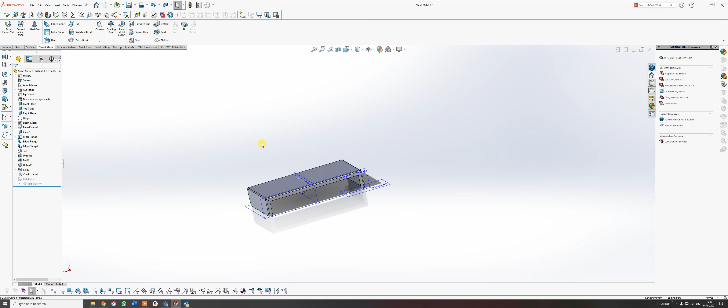Okay, I want to talk in this exercise about corner trim settings. It's very simple. This is as far as you probably have got from the previous exercise.

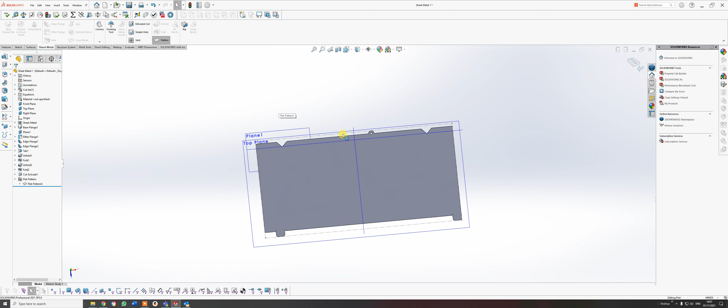If you actually flatten that pattern out, I've done it previously so I'm just going to unsuppress it, and it comes out there. I then rotate this round, and what I'm trying to do is, if you look at the flat pattern here, I've got that sort of corner. When you actually fold metal up, it can cause cracking. I call it a stress raiser.

To actually give that relief, you can trim those corners. So you can either go through here to corner trim, or go to insert, sheet metal, and pick it up in there. It doesn't matter which way, it's the same thing.

Now the settings I've got there you can keep, so it's 5mm and then 0.8 millimeter, which I haven't got. Well, if I go to ratio thickness... no, there should be 0.8.

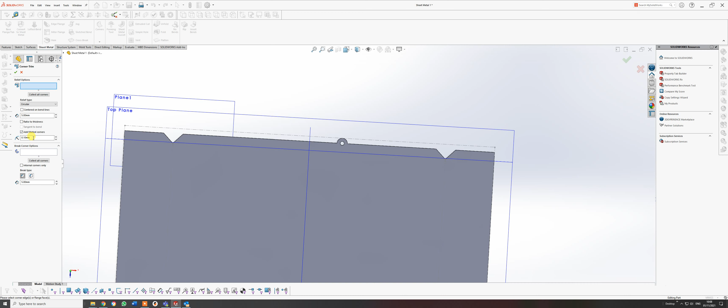Okay, so it's just a matter of where the blue highlight is going in and picking the places that you actually want to give a little bit of relief to, and then giving a green tick.

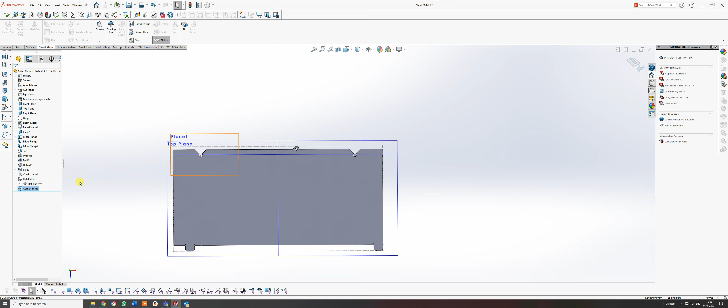Now if I go to unfold it, you won't notice any difference. It's just in the flat pattern marking, so when it's stamped out, those will actually be put in from that. That's all you really need to know at this point.

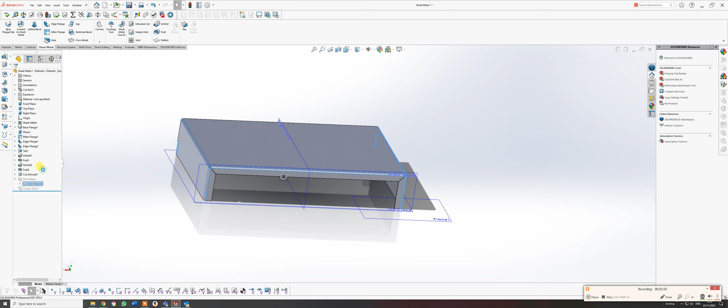There is a lot more you can look at because there are different types of relief. If I just go back to the flat pattern, and if I just go to edit feature on that one, you can see.

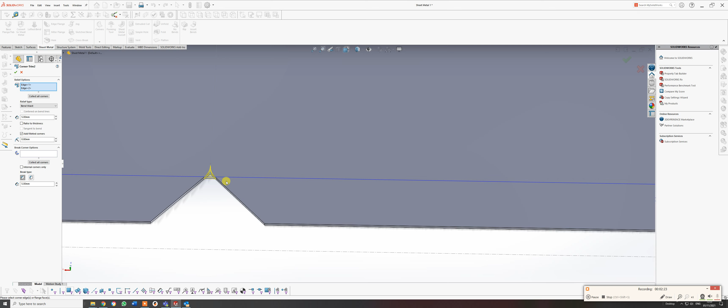We've got different options in terms of circular, square, and bend waist. So if I just do that once more, click on each individual one of those, you'll see the difference. So that's square and that's circular. For this particular exercise, circular is absolutely fine.

If you're doing it on areas like these, you can do it as what we call break corners, but for now this is probably as much as you need to do. You can go into it in your own time later on.

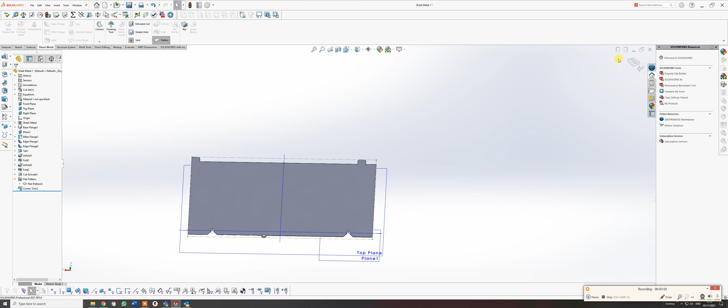What I'm going to do next, let me just give that a tick, so it should actually fold up again. No, it's not going to do it for me. Let's take that off. There we go.

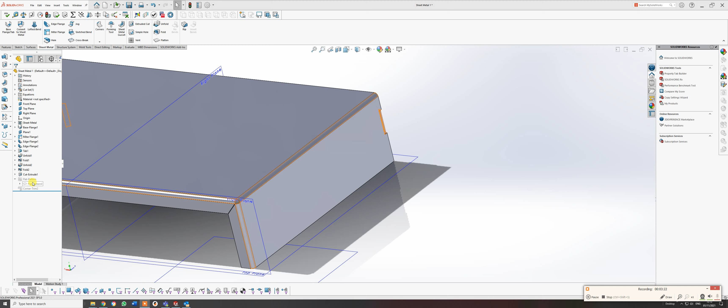I'm going to put those squares in that we talked about, so come back in one second. Okay, to put those squares in, we're going to use the unfold and fold commands, and you'll notice that those have actually been faded out because we're in a folded up method.

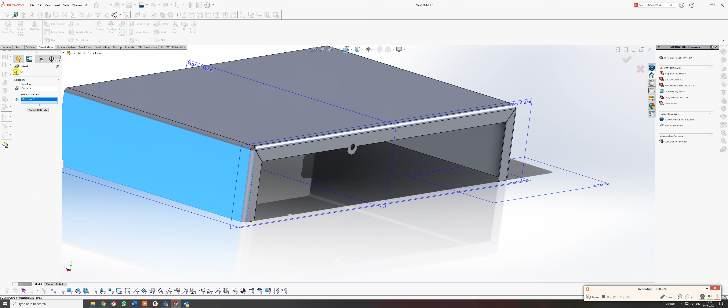I want to work on these corners individually, and that's where the unfold and fold come in very well. So all you need to do is click on unfold, and it says the fixed face. So this here is my fixed face, and then bend to unfold. Click on that one and give it a tick, and it should unfold. And there we go, nicely unfolded.

So I can now work on that surface. I need to put a sketch in. I'm just going to switch off my planes because I can get a little bit of better clarity. So I'm actually going to go to sketch.

I'm going to do it on that surface there. I'm going to use the rectangular tool because it's a rectangular cut that I want to do. Just roughly put that out there, and then go to my dimension tool, smart dimension, and if I do that one there at 30, not far off.

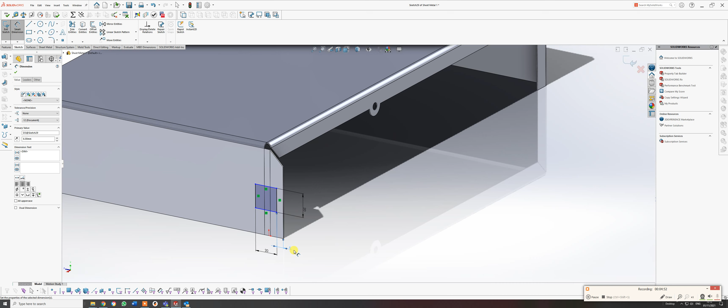Okay, and I do the side one at 20. Okay, and then I need that line there to the edge of that, there is 6mm. It's 6. Okay, and the distance from the base to that bottom line down there is 25mm. Let's put that out there.

And 25. Okay, I've fully defined the sketch that I want to cut through. Now I could go to features and extrude cut on that one, but I'm going to go to my sheet metal toolbox there and do the extrude cut because it will give me the option. Well, it should have given me the option to go up to thickness of metal, but don't worry.

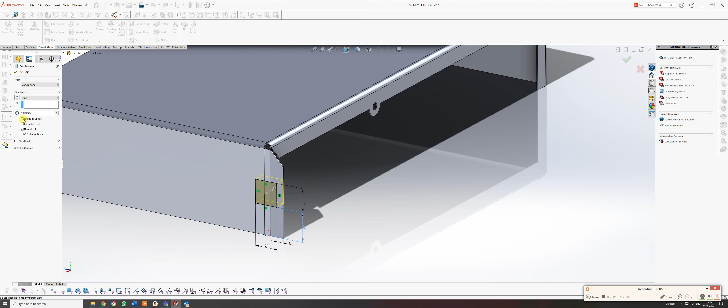Sorry, I've got it there. Link to thickness of metal on that one there, so it will just go through for that. That's the thing about SolidWorks; it's so vast and so many different things that you can forget what you're up to. So we've got that square in there now.

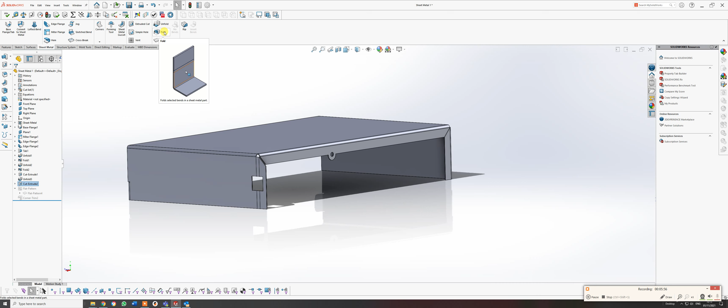Now, what I would normally do, if I just then fold that back up again, so just go to fold command.

It's already selected my fixed face, select the bend I want to fold, and then just right hand click, and you can see that's gone around quite nicely.

Now to get one exactly the same on the opposite side, I'll just show you this because it doesn't work as it would do in terms of your setup, so I keep switching this on and off.

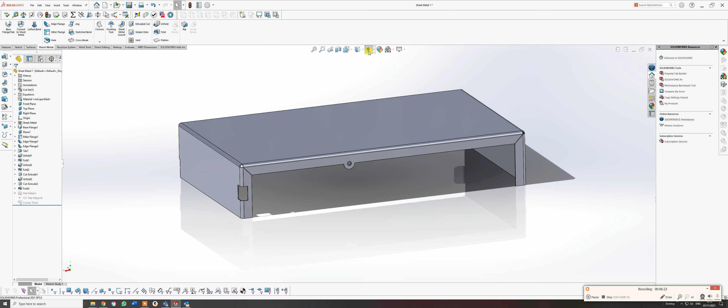Right, let's try again. If I put those back on, what you would normally think you could do is go to features and go to mirror and mirror face plane. If I pick that as that there, and if I go to bodies to mirror on this one here and go to my last extrude cut, it won't do it. It doesn't accept it. Even if I go to features to mirror, I don't think that will work.

Or has it? Let's have a look. No, it won't do it. So it's a failed process to look at it. So in sheet metal, if I just go up to there, it will.

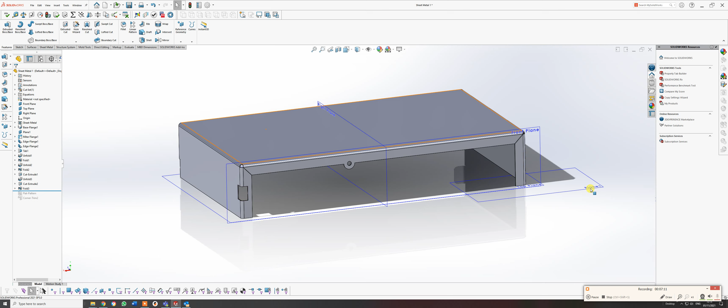I'll just delete that. You need to actually do it again. So let's do that very quickly for another exercise. So I want to unfold.

So back into my sheet metal, I want to go to unfold. So I want to keep that's my fixed face. That is my bend. And give it a tick out. And then go to sketch.

And I'll just do that roughly, doing that face there. Let's just do that. Okay, you can see how that can confuse things, so just switch them off that way.

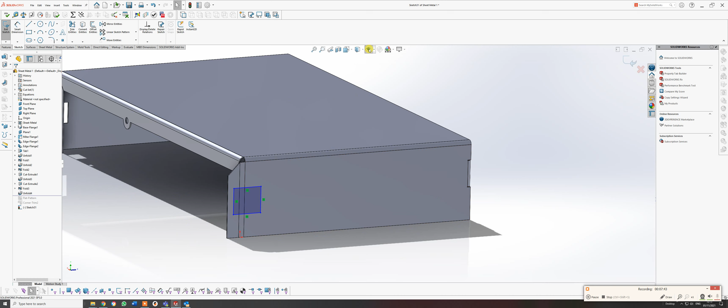And that smart dimension is at 20. Do that 20. Okay, is it going to change for me? Yes, 20 down there.

Okay, it's green tick, and we go from there to there. That's 6. Just get into sort of good practice that, just try and arrange it, because when you come to do your actual drawings, just try and arrange these in a place that actually makes kind of sense.

From there to there is 25. Okay, change and give that a good tick.

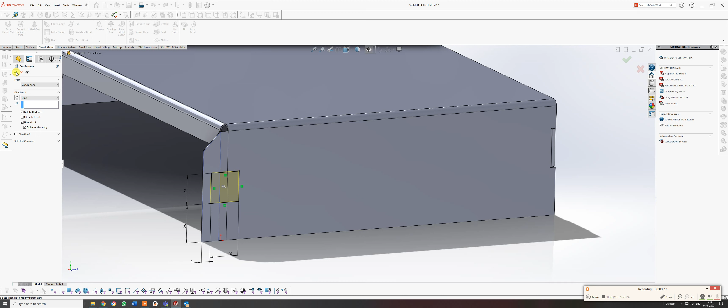And then go back to my sheet metal and go into extrude cut. Make sure link to thickness, which it is. Sometimes you need to joggle these about because my computer's 5+ years old, and I know a bad workman blames his tools, but sometimes processing speed does not always keep up with the program that you actually have.

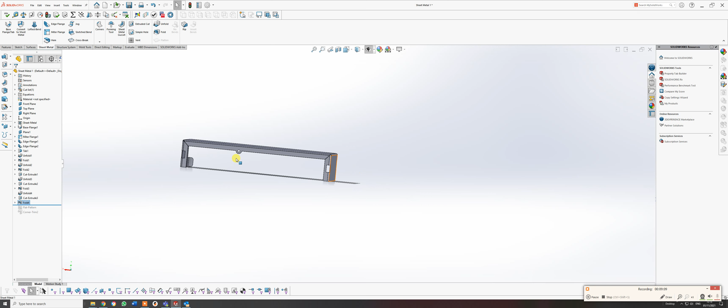I'm just right clicking there on my mouse. You see the icon. So there I have my 2 cuts into the box itself.

Now what you can do, I don't know if you realise this, if I was to create a drawing from this, let's just quickly do that. Let's say make drawing from part, and I'm sure you know all this.

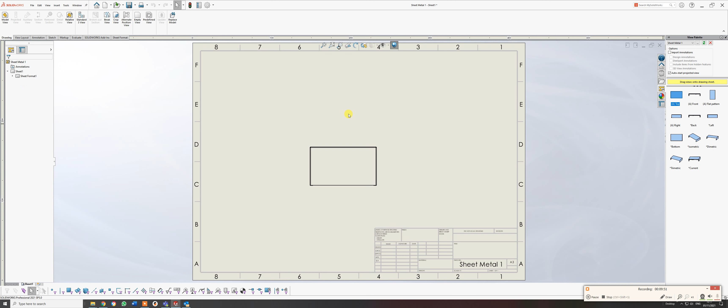Let's do A3. That's with my... is that my own? No, it's not my own. And if I want to bring in, let's just bring in that top view there. Let's do that one there, that one there.

If I were to go in and make a change, so that's my drawing there. If I control and tab, okay, it goes back into there.

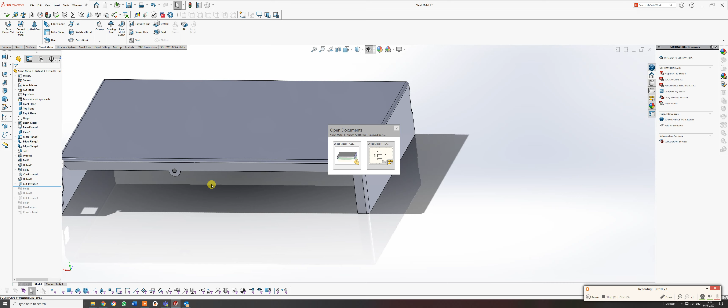And let's say I want to go back. Let me just take that one out. Let's just take it so it's folded back up again. Okay, and if I go control tab back to my drawing, okay, you can see it started to update the drawing.

So it has actually eliminated the tab that should be there. Let me just go for a regen. No, it hasn't come back in.

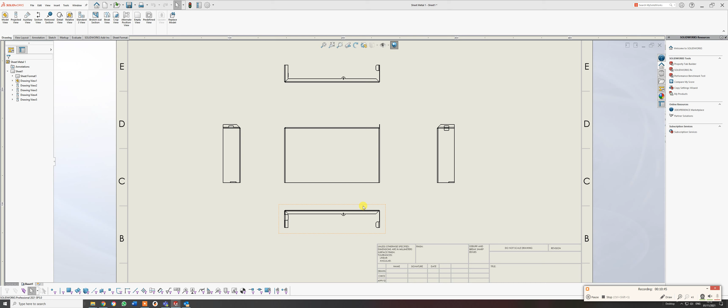If I just go back to my drawing, I say my drawing, my point there. If I just bring that to fold and unfold, and then come down to there, you'll see that this comes back in. So it kind of updates the drawing, and you can see we're back in there for now.

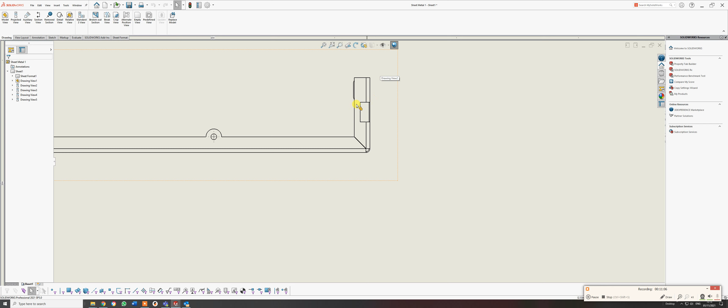I'd have to go back and delete that sketch from it. So you can actually, I mean, to save you time, if you're doing stuff in SolidWorks and to produce the drawings, that and that are actually linked together. So any changes you make will immediately be updated in that. So it would save you quite a considerable amount of time to actually keep the two going concurrently.

I'm going to delete this. I'm not going to save it.

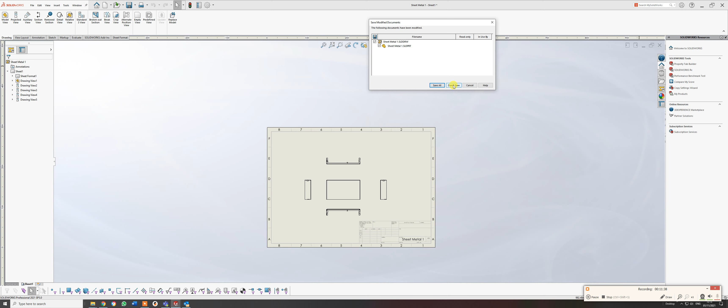Just don't save that. So we're back to this one here.

So what I'm next going to do is go on to the forming tools, but I'm desperate for a cup of tea, so I'm just going to go and grab one. See you in a minute.

Okay, I'm going to talk about the forming tools as we did in the session. Now, to actually find your forming tools, they are in the design library, and if you look, mine have gone away. Oh, here we go. I'm just going to go back to where I was to start with. If I just take that out, you'll see there, as default, you've got SolidWorks content, forming tools and toolbox.

The toolbox there is all screws, nuts and other bits and pieces that you can bring in and size, so you don't actually have to draw those. The forming tools, now this may or may not be in yours, and you need to actually add it in.

Now, to do that, if you go to your file directory, let's just see that one there. Okay, so onto your, in my case it's on my C drive. I don't know if you've put this onto a separate hard drive or whatever. You want to go down to program data, so double click on that, and then this is where it all goes wrong, down to SolidWorks. Now I'm on 2021. You're probably on the 2020. No, you are on 2021 there, but you can go back in time if you have other pieces.

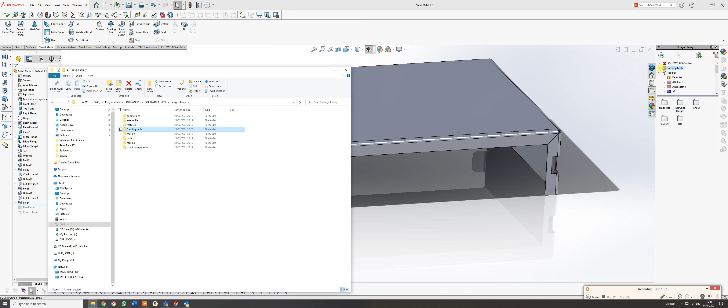So just to go back on that, so it's in my C drive. You're going to program data, SolidWorks, whatever version of SolidWorks you've got, and then you're looking for design library. You just then pick it up and drop it in, and that then gives you all the different tools that you require. So there I've got sort of different embosses, extruded flanges, lances, louvers, and different ribs, and we did sort of go over that a little bit in lesson before.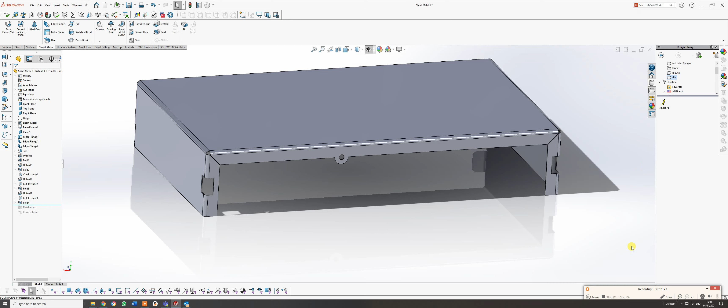Now these are all sort of default dimensions. So what I'm going to do for the first one is to put in an emboss. So we've got circular countersunk, countersink emboss.

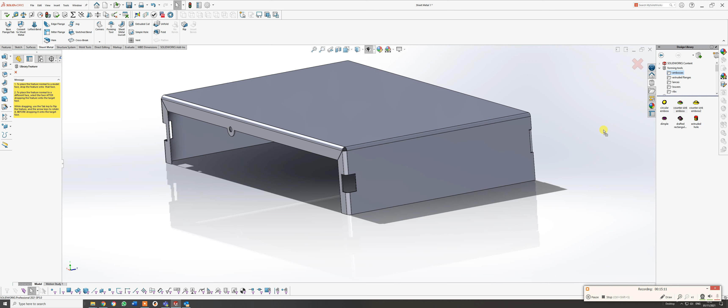There's two of those there, so I'm just going to look at doing a circular one. That one there, so the countersink or countersunk one. So I just literally pick it up, bring it across, and roughly find out where I want to put this. Now it's going to be around about the back here, and we can actually work out the dimensions in a bit for that.

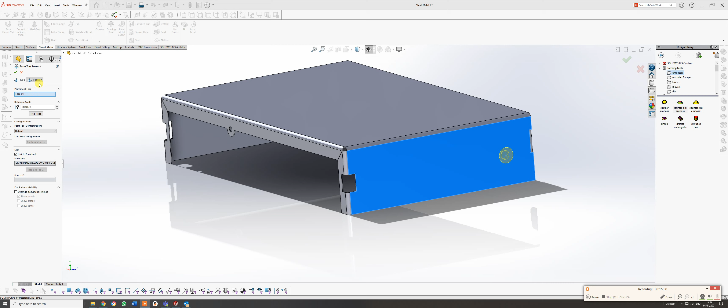And that then automatically brings up my form tool feature. So a bit like the hole wizard, I have got a position that I can actually place this. So to do that, I'm going to use the dimensions element to actually place where I want this.

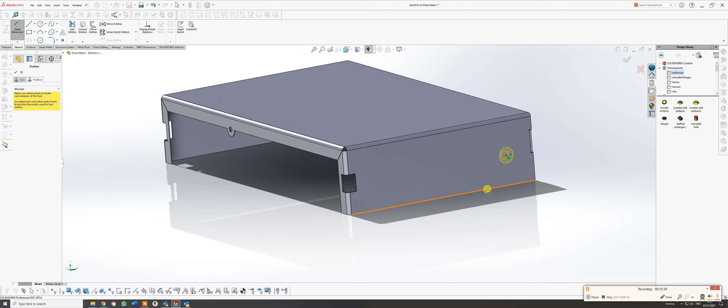Now, I beg your pardon, just one second. Okay, from that end point, or that line there, to that centre, I want that to be 45 millimeters. Okay, and then I want from that point there to the centre of that one there, I want that to be 30 millimeters.

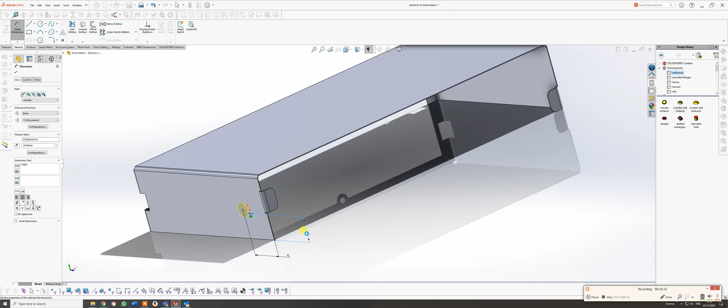Okay, so that's in position. Now it's already got the kind of primary values in there, so I can change particular aspects on it. Now there are configurations which I'll go into another time for that, because we can do configurations of parts as well.

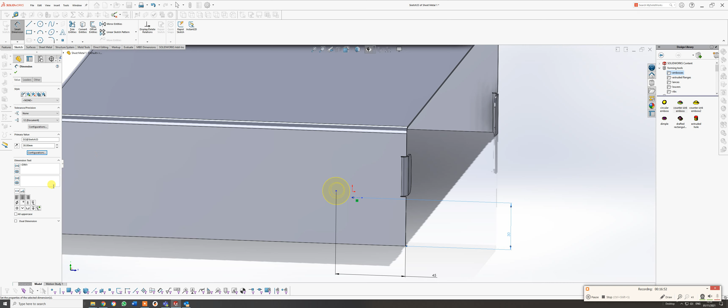Let me just bring that in. Okay, that's actually brought that centre into that centre there. Let's just give that a green tick and see where we are. If that's actually done it. It has done, but it's not in the right place.

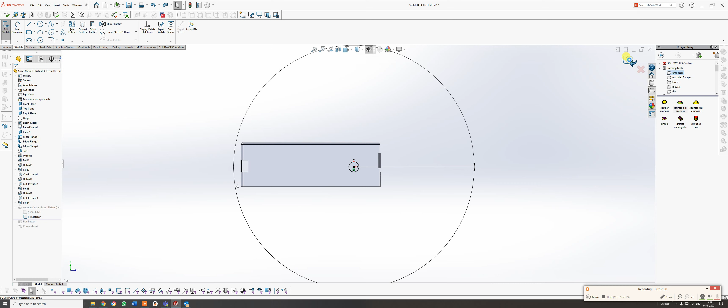So I've just gone through to look at edit sketch on those. Just let me come out of this if I can. Let's just see what it does. Okay, so it is actually in the right position. If I just go on to that, go to edit sketch, and you can see I'm 45 and 30 to the centre of where it is. But what was troubling me was that the UCS was slightly off, and I would have expected it to be in the centre of that.

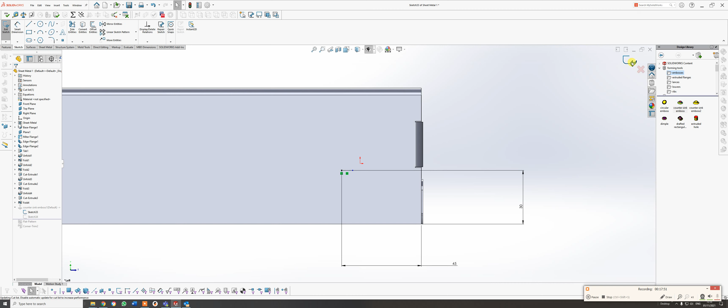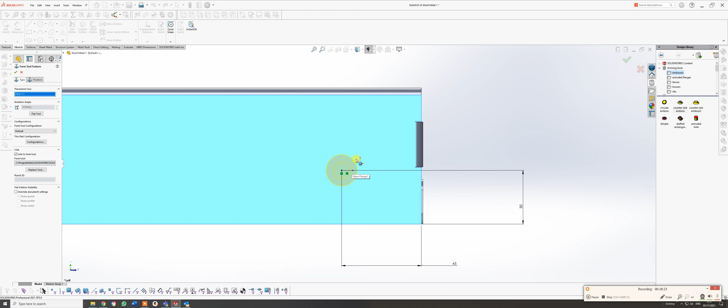Well, it's jumped to that one. If I go back onto here and go to edit feature, it doesn't give me a lot of options, only in terms of the actual position, so I can change the position by changing those elements. I've got the default one for the part configuration there, so I really need to go back in and look at the sketch.

If I show you this way, let's just see if we can do it this way. Edit sketch, let's just take that off there, and see what happens if I move that away. Okay, so I probably need to put some more dimensions in for this, and this may not be 100%.

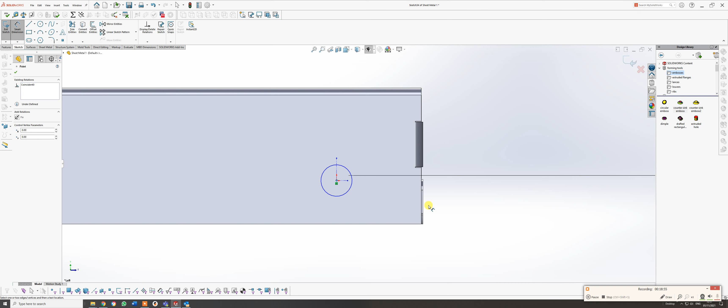I've also noticed something else is not, well, it's okay. So from there to there, actually it's to that face there. That should be 45. See if it's going to change it. It's done that, and then go from there to that point there, and that should be 30.

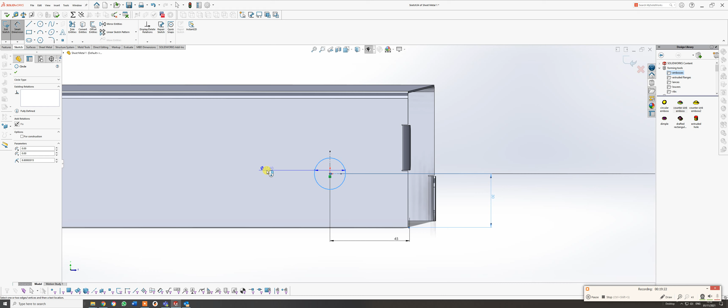Okay, what I wanted to do is actually try and change this, but this will give me a false element. Yes, so it then becomes over-defined because it's been predetermined on that one. Let me just give that a green tick. So you don't need to go back and do that, you can just drop those in there.

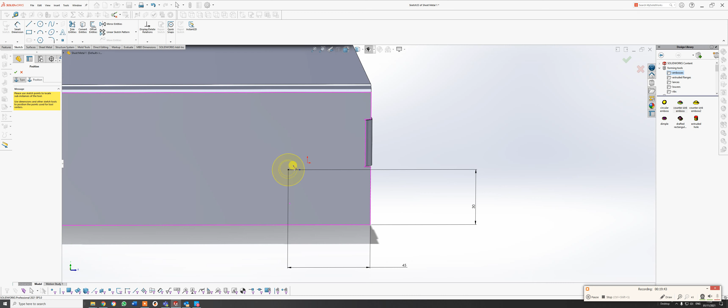Okay, because that's a default tool, I'm not going to change it. We can actually just put it in position so it's a standard size tool. You can actually create custom forms for it, and I won't show you that at the moment because it might confuse the issue a little bit more.

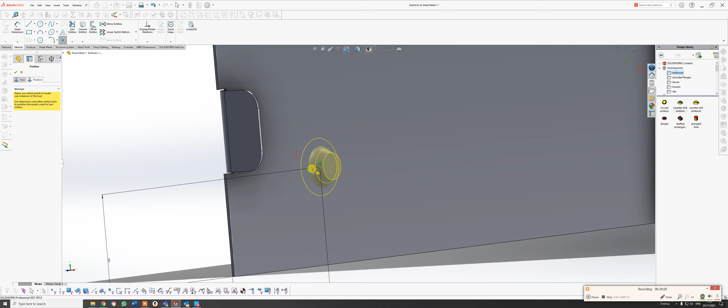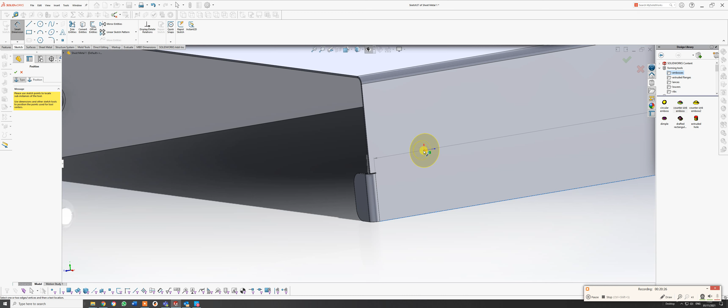Yeah, we'll leave it at that. So if you can just get those in at the distance, that will be sufficient for what we require. I'm just going to put one in on the other side. It's literally drag, drop, and go into position. Again, use smart dimensions from there to there. Let's make that 30.

Okay, and 45 from that point there to that point there. 5. Okay, and you can see that's all moved. If I just give that a tick, we should be absolutely fine.

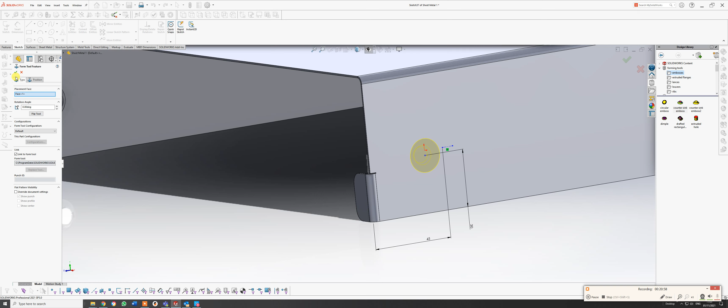And there we go, so that's the second hole. So these are two, let's just double check they are in line. No, they're not. Okay, so what have I done wrong? I need to adjust something here.

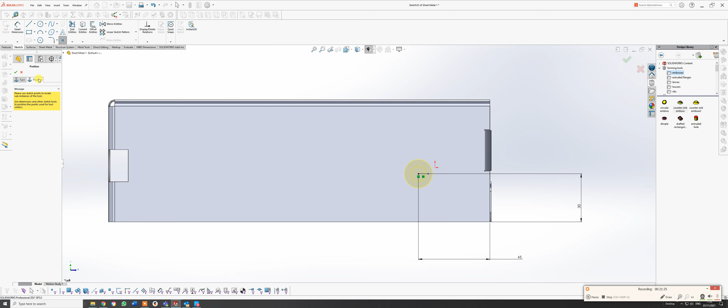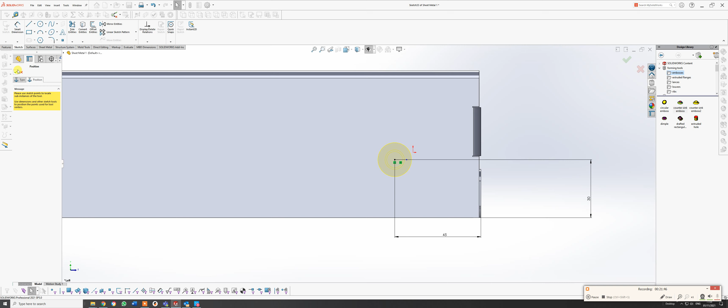So that's fine for now on that. As I say, we can go into creating custom tools, which I can do another time, but there's plenty of YouTube videos out there for that.

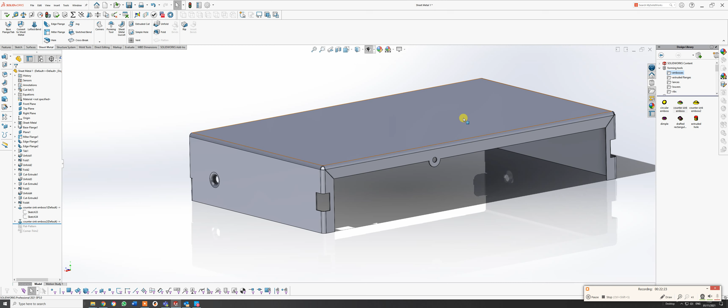Let's just have a quick look, see what else I can do for you on here. Should we put a keyway in? We'll put a keyway in around about here. So, okay, just to get a little bit more practice in, we'll add some louvers in like we did before. Where do we put these louvers?

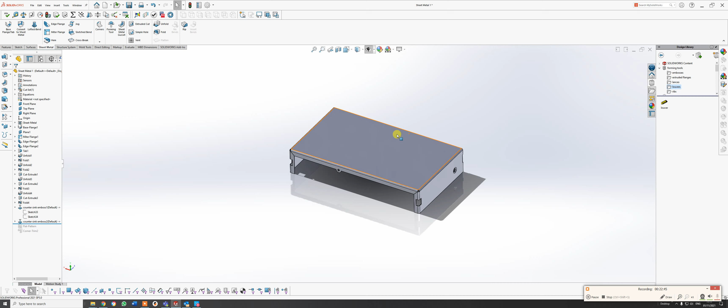Let's put those in the front. Well, at the back, pointing that way. So let's just pick on that. Okay, I need to rotate that around. So let's put that through. Let's flip the tool first, so it's on above. Let's go by 90 degrees, just type in 90.

And let's go to position. So I need to go roughly from about there to there. Let's make that 110. And from there to there, let's make that 40.

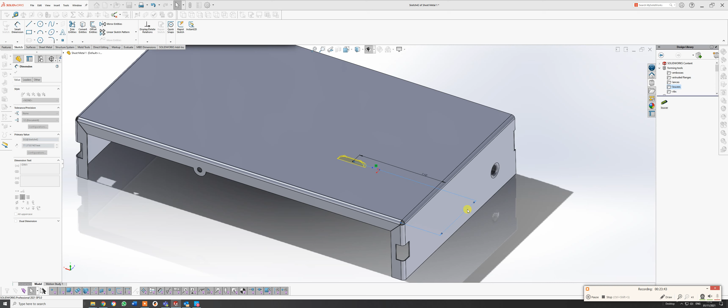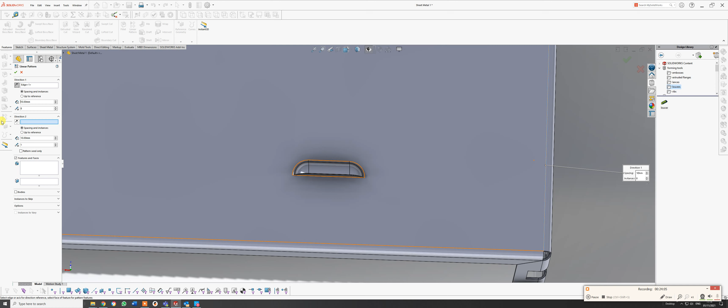And we will pattern those in a second. So let's just go up to features and linear pattern. So direction, I want to go in that direction. Oh, that's it. And how many of those do I want? 1, 2, 3, 4 of those. So 4 of those.

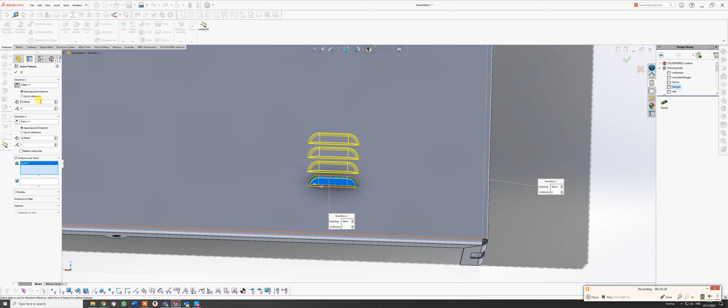And 25 mil apart. 25, there we go. And that should be absolutely fine. There we go, so that's our box there.

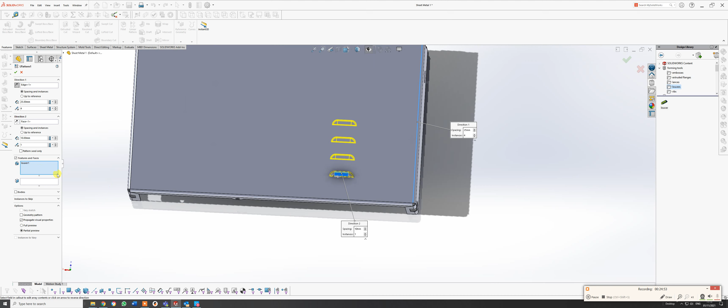I'm actually, maybe let's go to that pattern. Let's go edit sketch, let's do that three ways. So that's that direction, direction 2. And let's just pick on that one. And how many do we want?

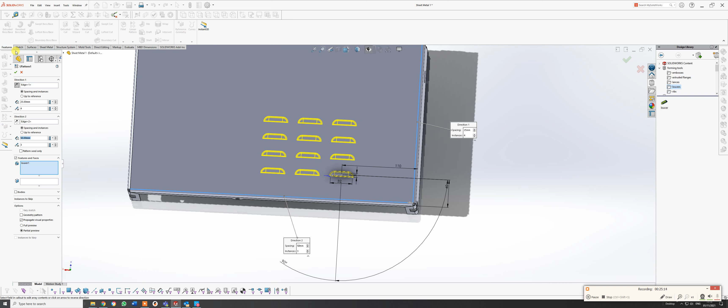3. Let's have those at 25, 50 apart. There we go. Makes it a little bit more interesting.

So, okay, let's wrap that up for sheet metal for now. And I may do one on actually creating your own forming tool or adjusting original ones that we have for later on. So I'll do that in another exercise.